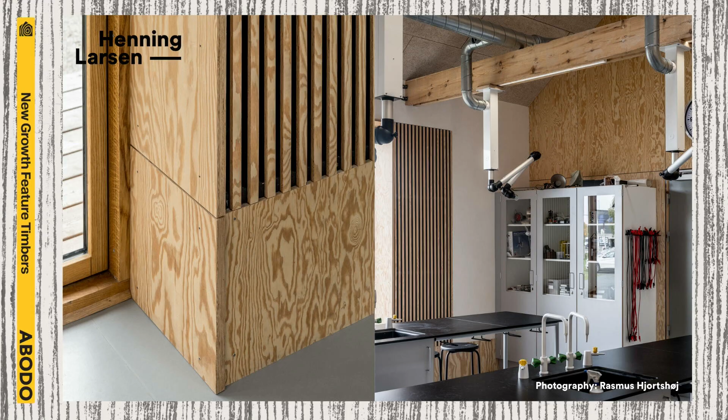Jakob manages the unique industrial PhD program at Henning Larsen, which co-hosts PhD candidates from co-sponsoring institutions in various R&D projects based on different Henning Larsen case studies. Topics include integrated acoustic simulations, lighting design and learning environments, design for disassembly of facades, and anthropological studies following on knowledge dissemination in shared spaces.

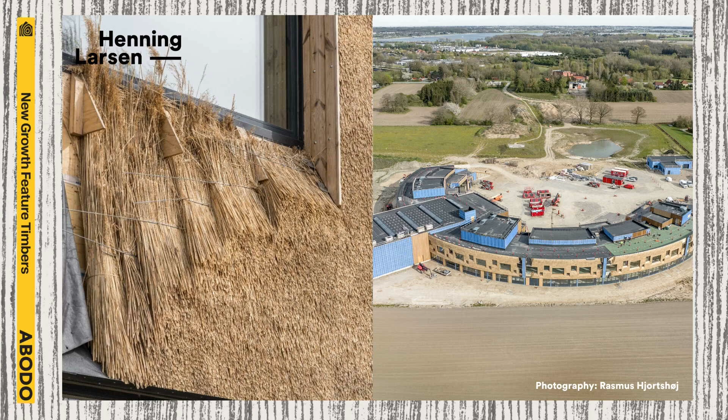And you really see this come to life in the work, from Fælledby in Copenhagen, set to be the city's first all-timber neighbourhood, to the Bestseller logistics hub in the Netherlands, which will be Europe's largest timber logistics centre, as well as projects like Feldballe School and the World of Volvo in Sweden, where materials like straw, seagrass and timber are reimagined in a really contemporary way. It's no surprise Henning Larsen has been recognised by Fast Company as one of the most innovative companies in the world. And aren't we lucky to be able to dive into all of that today?

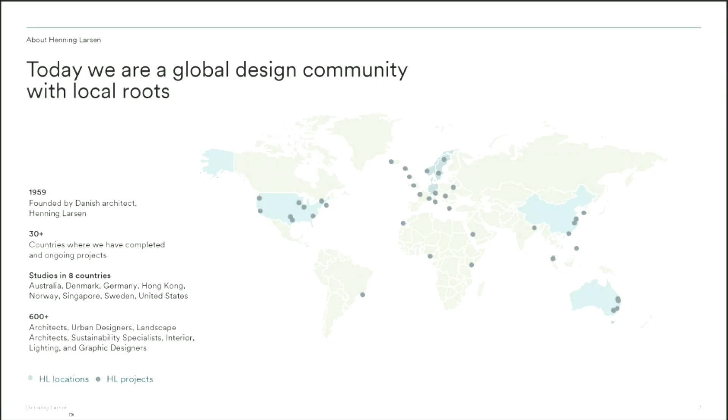This is Henning Larsen. We are born out of Denmark, Copenhagen, a Scandinavian and Nordic company, but we have studios across the globe—just established last year in Sydney, Australia, but also present in the US, Germany, and Singapore. We have a strong landscape team in Singapore.

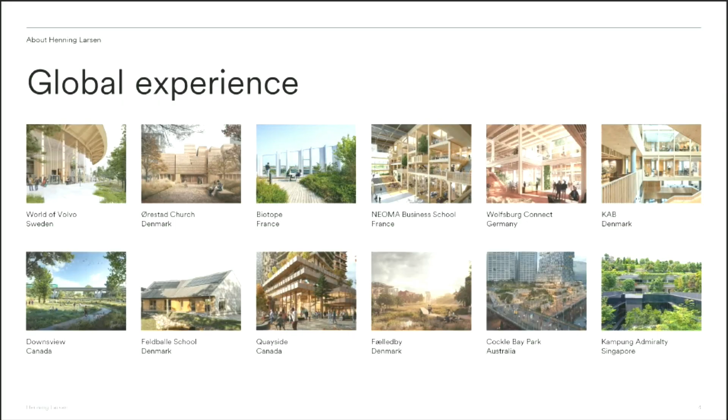This is what we do. You can see there's a lot of green and brown colors here. It's because most of what we do is connected with landscape. We don't see our buildings as monoliths or standalone in the cities—we are very much connecting with the surroundings and the nature around. The brown color indicates there's a lot of biogenic timber in our construction.

Henning Larsen heads architect, landscape and urbanism, and we don't see it as three different disciplines. When we design, we have competences on landscape, architecture, and urbanism all together. So when you talk about a Henning Larsen project, it's not just about the design or the form—of course it's about creating design excellence, but it's much more about understanding the context and the culture, and where we design and who we design for.

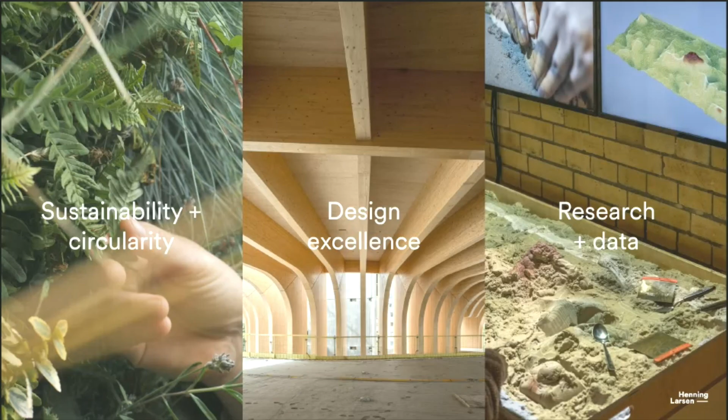We have three design drivers. The center one is about design excellence—long-lasting design, something we can be proud of not only today but also tomorrow. Then we are driven by sustainability and circularity. And then on the right side, Jay mentioned data—that is the right side of my mind, the data and the nerdy part.

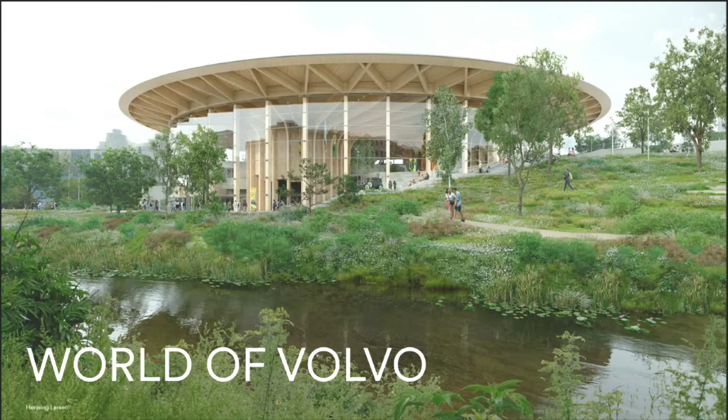In Sweden, they have what they call allemansrätten, the right to nature—no one can own nature. So when you build on a building site, everyone is allowed to go there. It's the same with Volvo here: you can walk around, you can go up to the roof, but if you need to go inside, you have to buy a ticket.

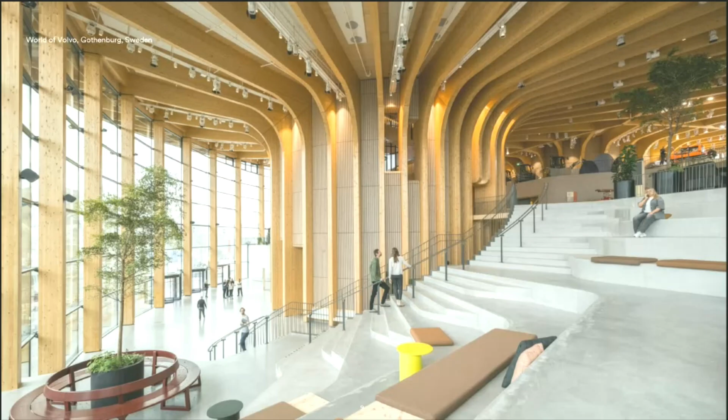This is the highway connecting Oslo and Copenhagen, where you drive through and see the lighting colors of the World of Volvo. It's designed as three big mushroom columns with a three-dimensional glulam structure. The scale of it is quite crazy. This is during the construction process—it opened last autumn, so it's quite new. It was really fascinating to see how this structure came together as part of the design.

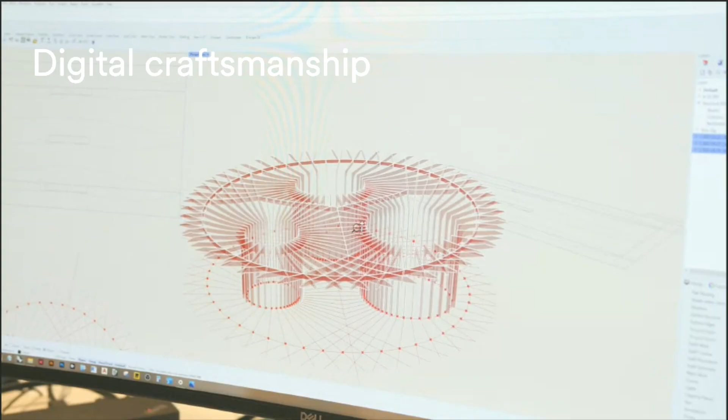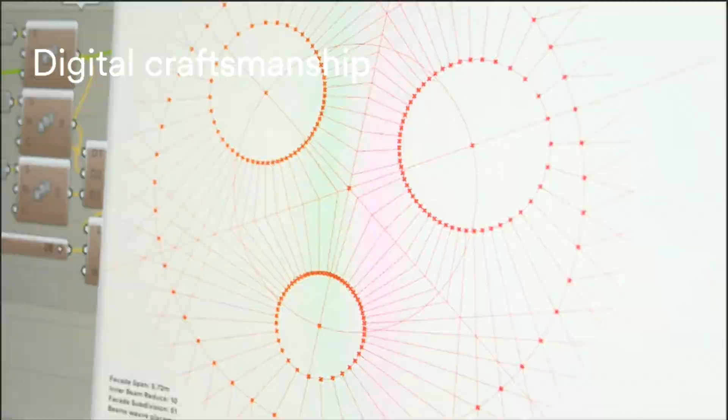What we also did, especially for my team, was work on a computational design workflow. This meant we were very much in dialogue with the suppliers and manufacturers up front—we didn't just design something and ask the engineers or manufacturer to construct it. We worked with the Austrian company to understand the dimensions and how to manufacture the glulam beams, then brought that into the design and built a parametric model around it. So our design drawing was also the manufacturing drawing in the end. And again, why timber?

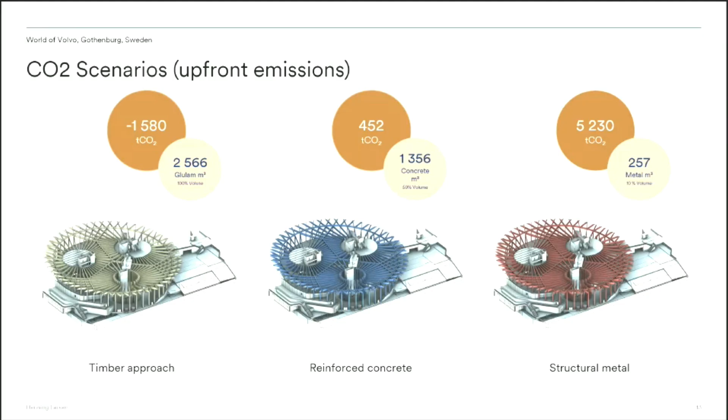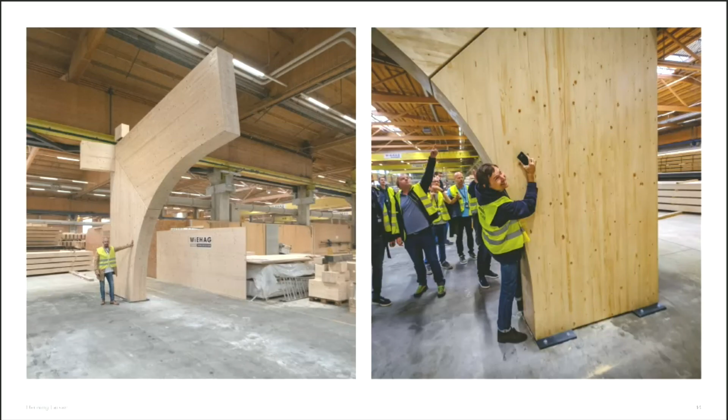I will come back to what is upfront and what is embodied carbon, and the whole life scenarios later on. One of the beautiful things about wood and timber is that it's not only about the numbers, the CO2, it's also about the feelings and the atmosphere. This is Philip, our design director, and he went down to Austria, and I have never seen a design director hugging a concrete or steel beam, but you can see on his face he was just so happy to see that beam coming up, that was the mock-up, that he was hugging it.

As mentioned in the introduction, there's also Fælledby. Fælledby is a new city, a small city developed next to Copenhagen. We have been the master plan designer of the city. This is the first full timber development coming up in Denmark. It's designed as a village, not as a downtown global neighborhood. It's very much on a human scale.

Maybe some of you can recognize this image, or see the reference for it. Maybe some of you have been to Copenhagen, to Christiania, the free city in Denmark. It's the same kind of atmosphere we want to design here - something that is self-grown, something that is at eye level, something where people meet people.

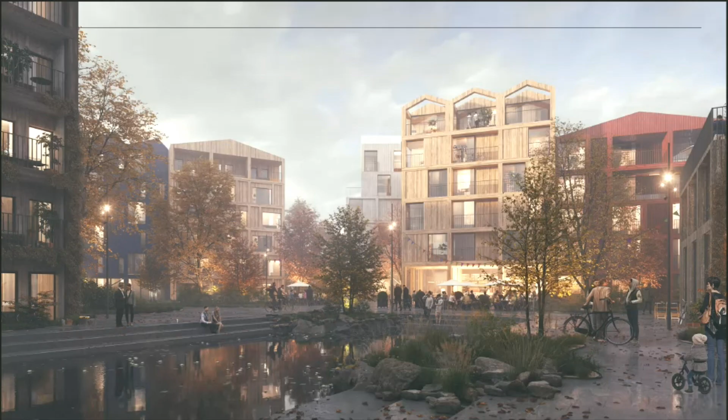We have different architects working with different structures, different designs within the master plan, but it's all within the framework of the master plan and the dogma of designing with full timber structures.

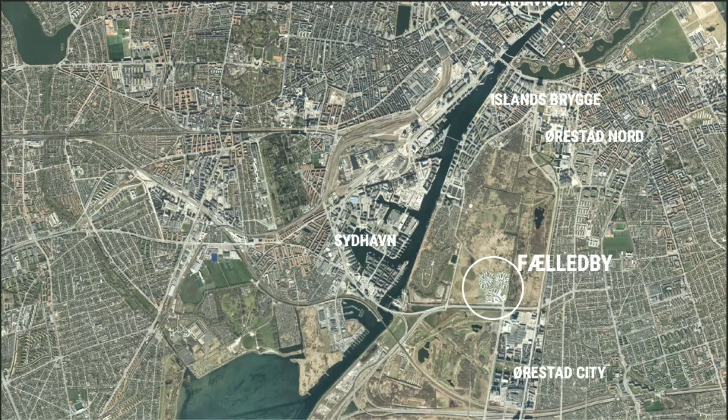Here you can see Fælledby in the center with the ring around it, and it's very much connected to downtown Copenhagen up north. So it's one of the last green areas right next to the metro and the infrastructure. But if I zoom in, it's about connecting green and urban.

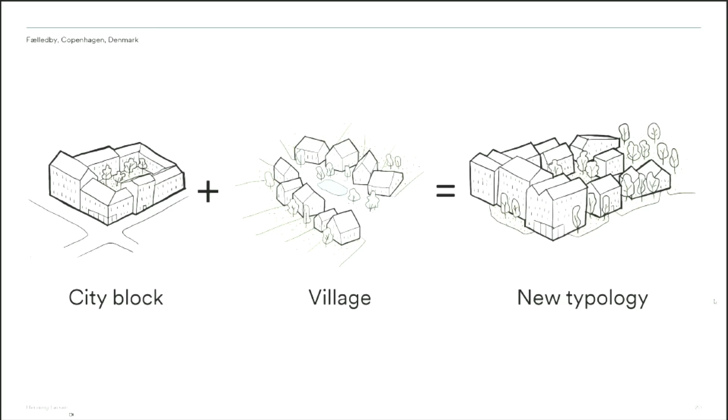We had the idea of taking a traditional city block - Copenhagen is built around the city block, where you have the private in the courtyard and the public on the perimeter. But here we want to combine that with a village structure where you have the central plaza, the pond, and make a new typology that opens up to nature, but has an edge to the quarter or the plaza and center.

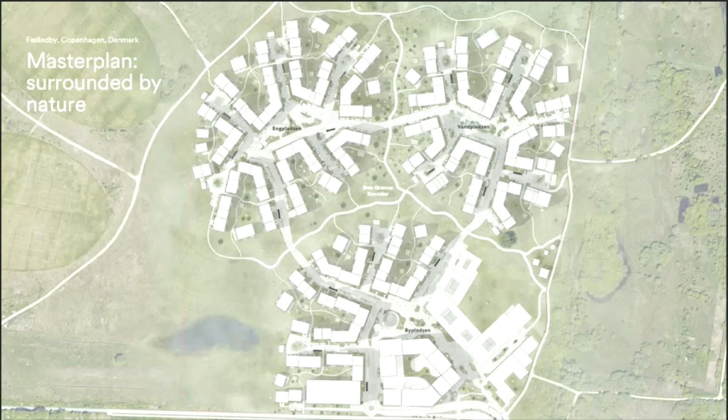Instead of designing a full master plan that was just uniform, we designed three kinds of small villages with one plaza in the center, and then it opened up. That's also how we structured construction - at the moment we are building the one in the top right-hand corner, and then we go to the next one, and then to the left one.

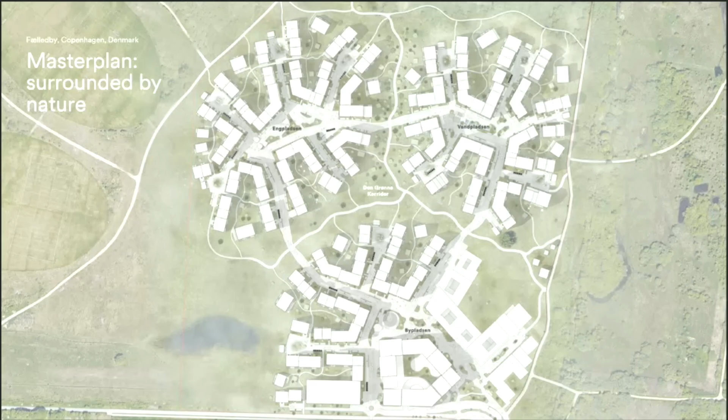There's parking around when you come in, but you have to take your bike or walk to your apartment. Of course you can come around as a fire entrance, and you can have drop off, but not every apartment has a dedicated parking place. It's very much connected to a bike cycle network and the metro line.

We have promised to deliver 10% higher biodiversity net gain. That means we take out some green area, but we provide green area with higher biodiversity, a higher habitat quality. It's also such that if you buy or rent an apartment here, you are not allowed to bring your house cat - no cats are allowed because they chase the small birds and the mice. So it's not only something we design for, it's also the premise of nature when you move in here. You can see all the roads and pathways are lifted.

It's also to be resilient, so when we have heavy rainfall it can be absorbed by the landscape - it's not like another drainage system or pipe, it's open water resilient management. Here you can see this is from last week where the structure is coming up. The first residents will move in this summer.

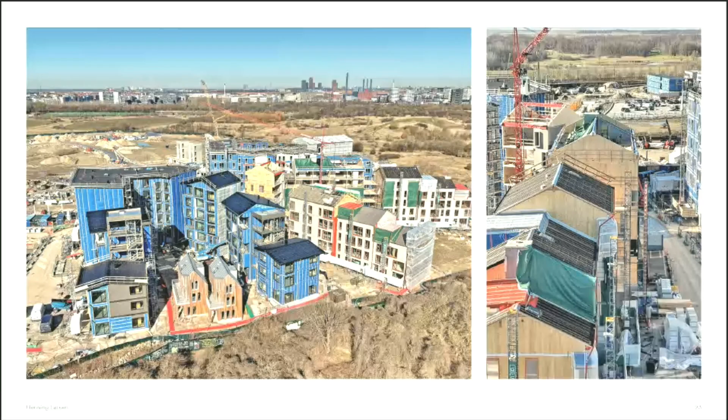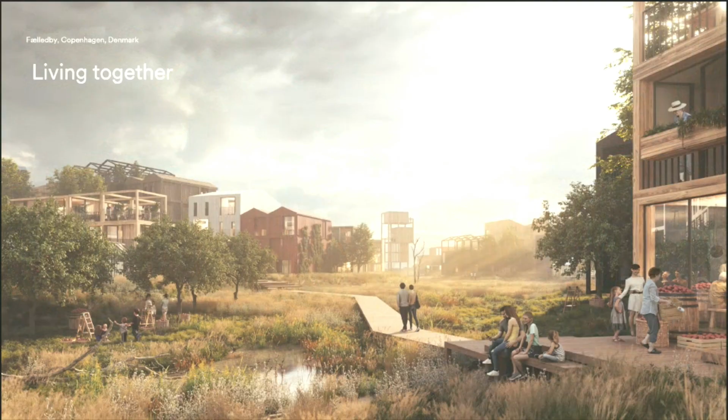It's all built in timber, and most of it is with prefab. We do prefab elements like these container blocks, and we ship them and put them together like Lego blocks, building around that. There's really much diversity in it, so it seems very random, but it's actually broken down to Lego blocks that you can build offsite and transport. We also have low-income family homes here, so it's about keeping prices down and buildability up. The image we imagine in the end is that you'll be connected with nature, living close to nature, but also in a new community next to Copenhagen.

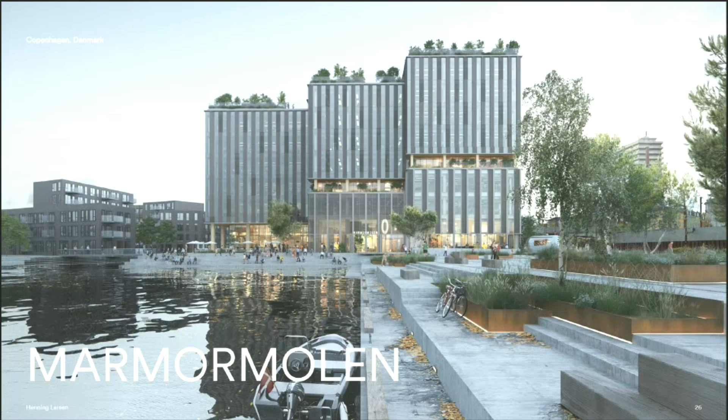This building is also ongoing. This is the largest timber building coming up in Denmark at the moment. It's called the Marble Pier, located on the harbor front of Copenhagen.

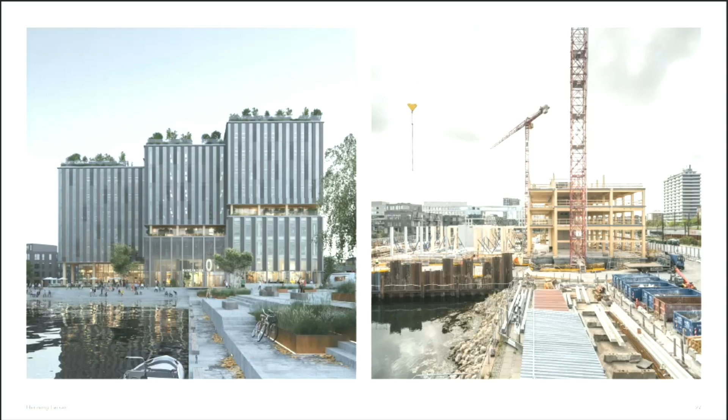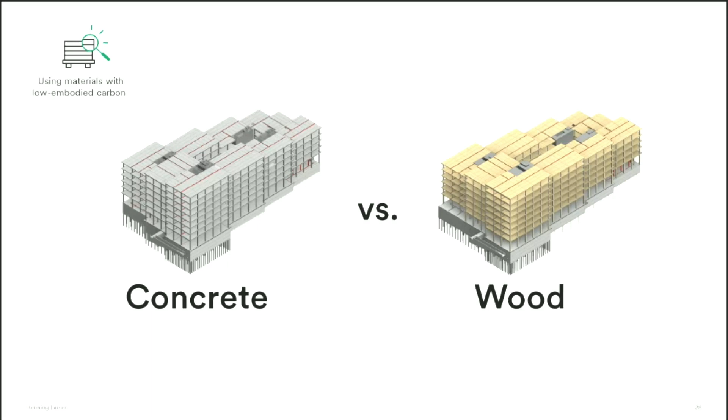It's a hybrid structure. We have concrete cores, and slabs, beams, and columns with glulam structure. The good thing about this, coming back to data, is that this building was designed as a concrete building. We won this competition about 5 or 6 years ago, and at that time we designed it in concrete because that was the industry standard. But the client came back and said they had difficulty finding an anchor tenant, because the anchor tenant wanted a more sustainable profile. So together with the client, we decided to redesign the structure from full concrete to a hybrid, predominantly timber building.

So we have data, a full Revit model of both versions, so we can compare apples to apples. If you look at the upfront embodied carbon for just the superstructure above ground, we have a reduction from concrete to timber of around 8,000 tons of CO2. That means we have a minus on the timber side, because the carbon sequestration in the biogenic materials outweighs the concrete cores and the supporting steel structure. The red lines are the steel structures that are supporting. If you look at the whole embodied carbon for the entire structure, including basement and envelope, it's not negative, but we still have the reduction of 8,000 tons of CO2, around 3.7 kilograms of CO2 per square meter per year.

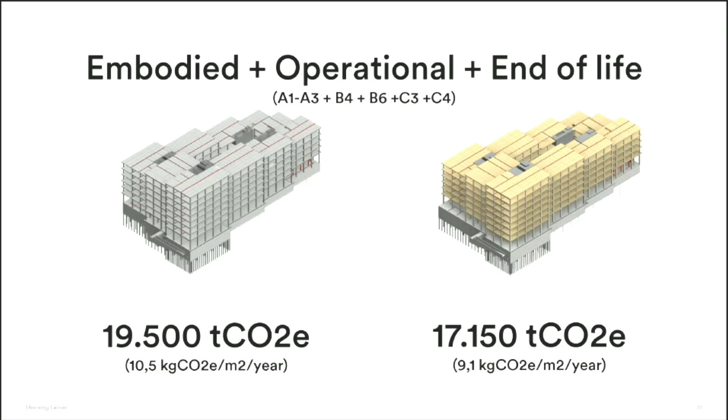This is a number I'll come back to later, but it's what defines how you get a building permit at the moment in Denmark under the new regulation. If you look at the end-of-life scenario, it balances out. That's how we calculate the life cycle of the building, the carbon life cycle. There's an end-of-life scenario where the biogenic materials release CO2 in the C3 and C4 phases, so that balances up. That's why we look very closely at the embodied, upfront emissions, the whole end-of-life scenario, and of course the operational emissions.

I said in the introduction that this is not only timber and wood - it's a hybrid structure. We have the base and foundation in concrete, and the cores are also very much about stability in the building, but also fire regulation and fire safety with the concrete cores. It can also be done differently - we're doing a residential building just next door now where we use CLT cores.

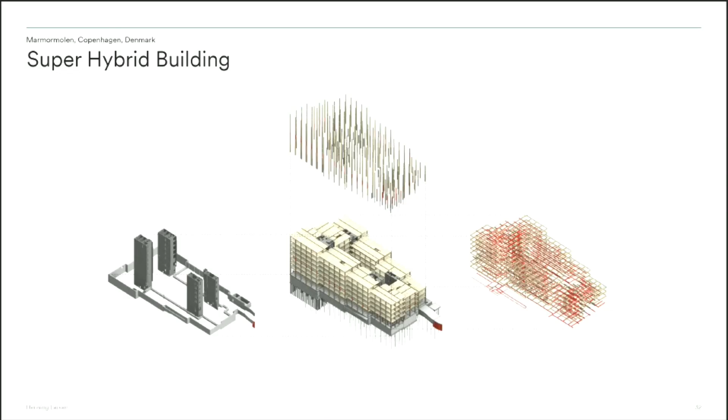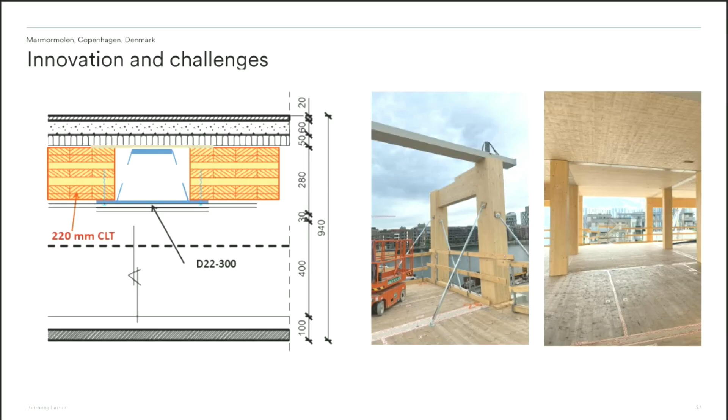Then we have substructures in steel, and that's also because this design was originally designed as a concrete building when we transformed it into a timber building. Of course, timber, as you saw with the Volvo case, takes up more mass - the beams and columns are bigger. So we have this hat profile, hiding the beams so we can run the HVAC ductwork through without compromising floor-to-ceiling height. But these are quite substantial, like fridges coming down - 60 by 60, those beams coming down. So again, when we work with these kinds of structures, it's very much about space planning and space layout.

That is the first thing we look at, how to spatially layout these open floor spaces, because the columns take up more space than they do with a steel or concrete building.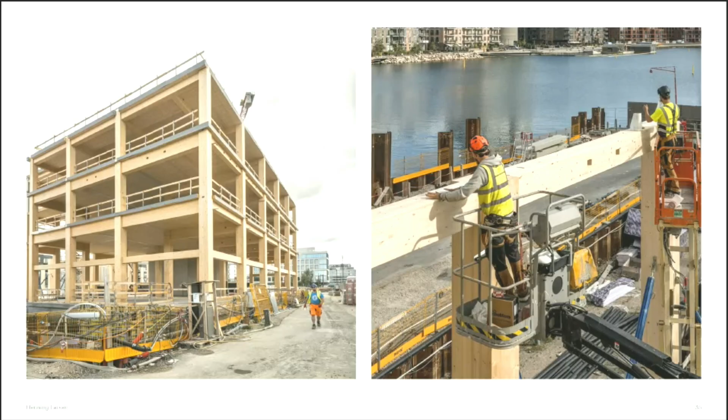One of the good things is that the building site was more quiet when they came above ground. That meant they could actually work on the weekend. Normally every building site in Denmark is closed on weekends because of noise pollution for the neighbors living next to the site. But because this site doesn't have steel welding or concrete piling, they could work on the weekend too, putting together the timber structure.

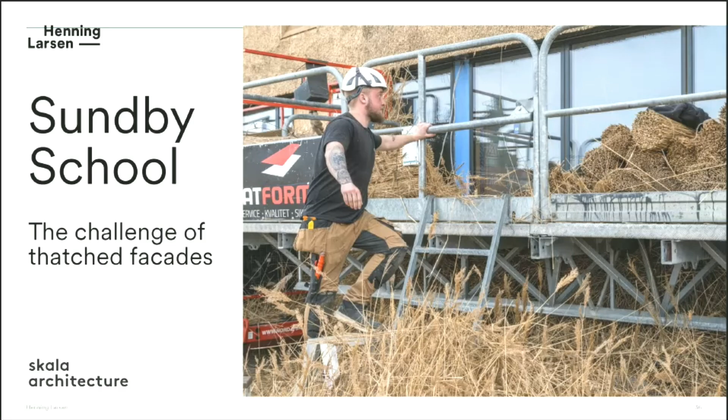The next project I want to show is more about the use of biogenic materials in an alternative way. This is the Sundby School, a primary school in Denmark, and it's the first school where we have a thatched reed facade. The inspiration comes from the local community.

The traditional historical buildings have a thatched facade, not only roof. Maybe some of you have seen roof structures like this in the north part of Germany, but it's also very traditional in Denmark. In this region they also have the facade, so we thought maybe we could be inspired by that and use the technology and craftsmanship that was also present in the local community.

Here you can see the craftsmen attaching the facade. We have a facade with a wind barrier on the inside, and the thatched reed is exterior cladding. It has a lifespan of around 20 to 30 years - we are expecting 25 years before it needs to be retouched or recladded.

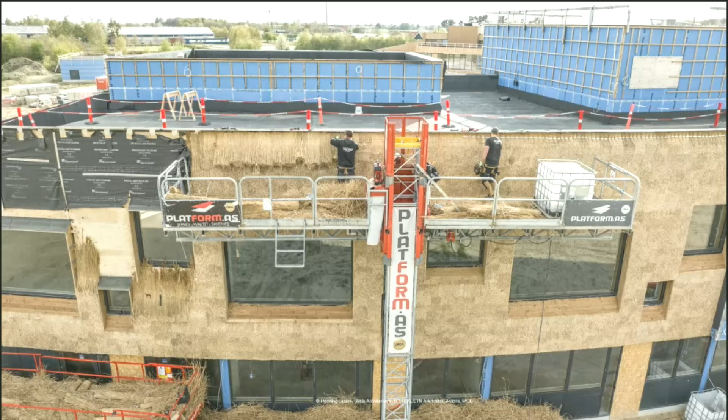You see how they're working, and there's a lot of leftover waste product. But again, it doesn't have any impregnation, it's not chemically treated, it's purely natural. They are water resilient. So all the leftover product we just put in a container and then put it out in the field as fertilizer or for soil. The leftover product just goes into a circular system with nature.

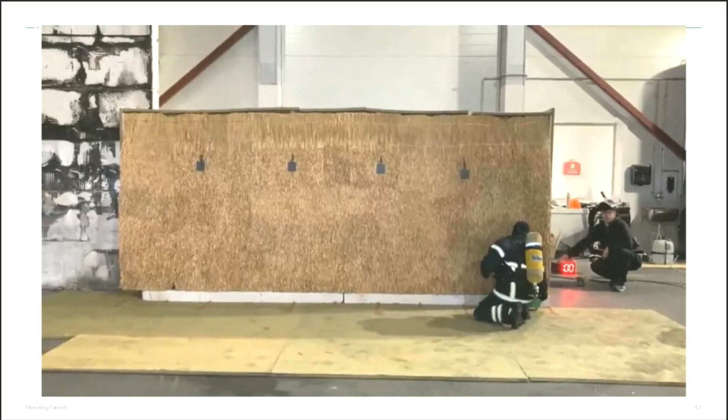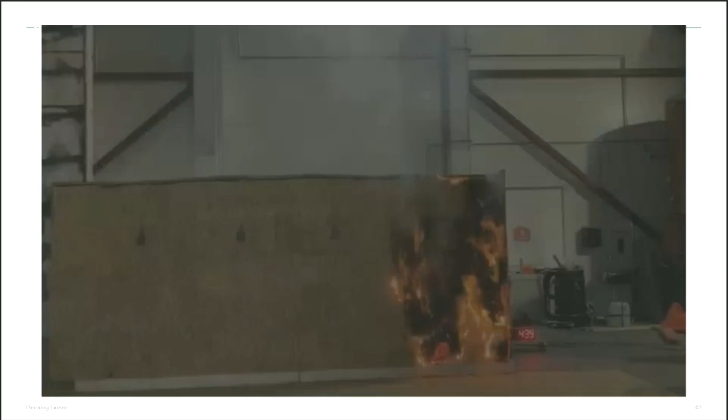Again, a lot of people ask about fire. Yes, reed straw can burn, but it's actually not that flammable. This is the fire test we did with the Danish Fire Institute. Here there's a wind cannon on the right-hand side, blowing wind across the facade horizontally, and we observe the spreading of the fire. You can see the clock - now almost 6 minutes, and it hasn't really spread. It's not like paper firing up, it goes quite slowly.

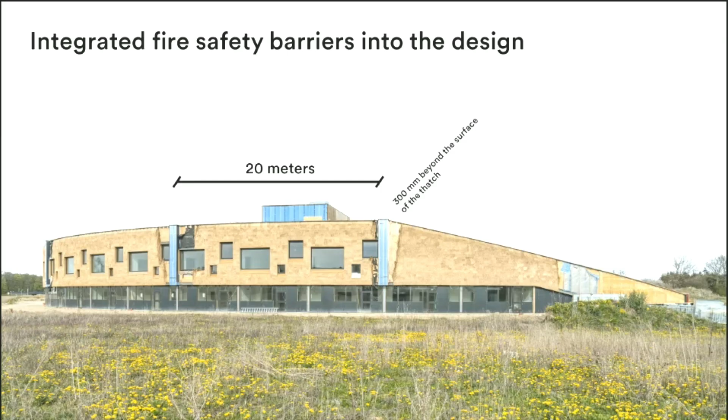But it's also a risk, something we had a very serious dialogue with the client about. We did those mock-ups, invested in it, and did a lot of theoretical exercises, but we had difficulty understanding what the fire strategy should be. It ended up that we went and talked with the local fire brigade, and they told us their fire trucks could spread water 10 meters to the other side. So we decided to put in vertical fire barriers every 20 meters along the facade, so the fire brigade could manage the fire within that 20 meters. That was part of the fire strategy - sometimes you need a lot of technical analysis, but sometimes you just ask the fire brigade how big their truck is, and you find a solution.

This is the courtyard in the center where it steps down, and you have the thatched facade towards the fields, the connection to the surrounding nature.

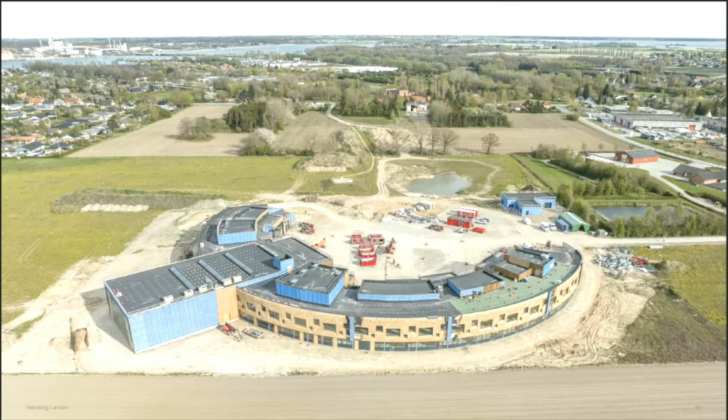So why so much talk about wood, straw and biogenic materials? In Denmark we had an organization called Reduction Roadmap, and it was not a political organization - it was driven by the industry. It was industry partners, a small group that became a bigger group, across manufacturers, architects, designers, and engineers. We all said that we can do better, and we will need to do better.

So there was political pressure from the industry to put up carbon targets on new builds, and create a roadmap for it. It all started because we want to be within the safe operating space, within the planetary boundary. We need to reduce our carbon emissions, especially on new builds. So a lot of analysis was done on what we do today with our housing and what we need to do in the future.

Where do we need to go? Today we spend around 480 kilograms of CO2 per square meter on new builds in upfront carbon, and we need to go down. It's a huge reduction if we want to be within the planetary boundaries, down to around 20.

If you look at kilograms per square meter over a year, in Denmark we calculate over a 50-year lifespan of the building. Buildings constructed before were around 10 kilograms of CO2, and we need to go below 0.5, 0.4.

So we have a big challenge in front of us. But this actually was a push for political action. Last year new requirements came out for CO2 calculation for all new builds. There's a limit - you cannot get a building permit if you don't document the total life cycle carbon of your building.

It's divided into typologies - small buildings, vacation homes, residential and office buildings, which are the majority, around 7.5 kilograms of CO2. Then there's a limit on the construction side, shown with the dotted line at the bottom. The 7.5 is what we do on the building - the operation, the energy, the concrete, steel and timber that go into it. The bottom figure, 4 and 5, is for construction - the carbon it takes to transport material from the manufacturer to the building site and the machinery on site.

So what we see today is a lot of electrification on the building site, which also benefits lightweight structures like timber - not so much diesel engines. Everyone needs to calculate the amount of diesel and electricity they use on building sites. That's mandatory now. So this is the standard today, and next year there will be an even more ambitious standard.

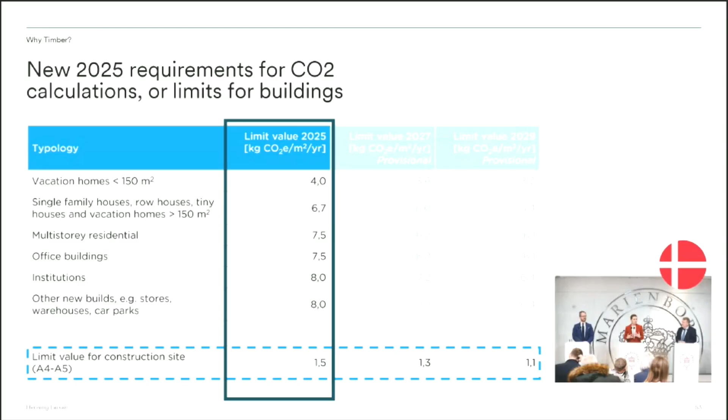In 2029 it will be even more ambitious, and hopefully there will be a standard coming after that, and hopefully we can go further than that. But is that ambitious enough?

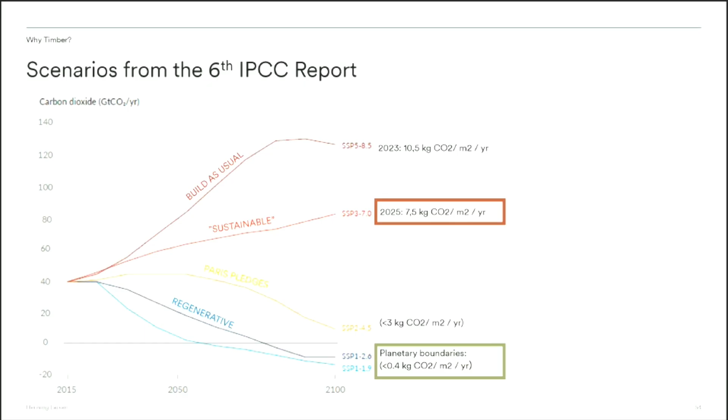With regard to the IPCC report, this 7.5 figure, we can barely call it sustainable - we will still emit carbon. We need to stay within the planetary boundary as listed before. We need to go low, below 0.4 kilograms of CO2 per year. So it's a long way there, and we need to act quite fast.

How do we do it in Denmark? This is the LCA, the life cycle assessment of a building. In Denmark you need to take into account the product phase and the construction phase - that's what I described before. You need to document those two.

Then in the in-use phase, you need to take into account replacement. So if you have windows with a lifespan of 25 years, you need to calculate them twice in the CO2 calculation. Then you have the end-of-life scenario, the waste processing and waste disposal.

As I said before, that's where the carbon is released again from the biogenic materials. Then you have the operational energy - the energy consumption, electricity, and district heating that goes into the building. And then you have the opportunity for beyond the building life cycle.

If you use reused elements, or recover materials, it counts as zero in your calculation. So if you have a reused concrete slab that already emitted its carbon and you reuse it in the building, you don't need to calculate it twice - it counts as zero emissions. So that also pushes the industry very much toward circularity.

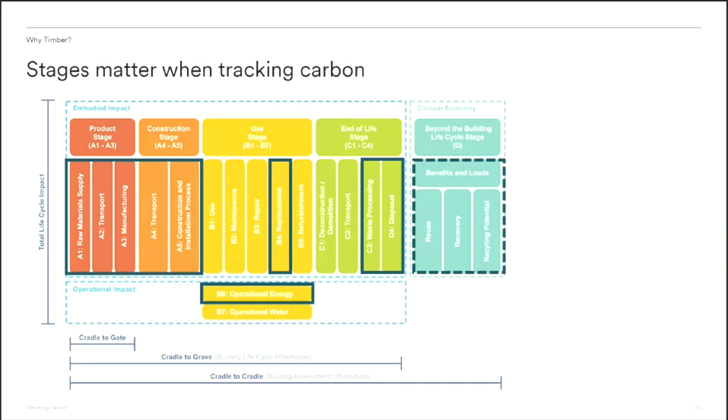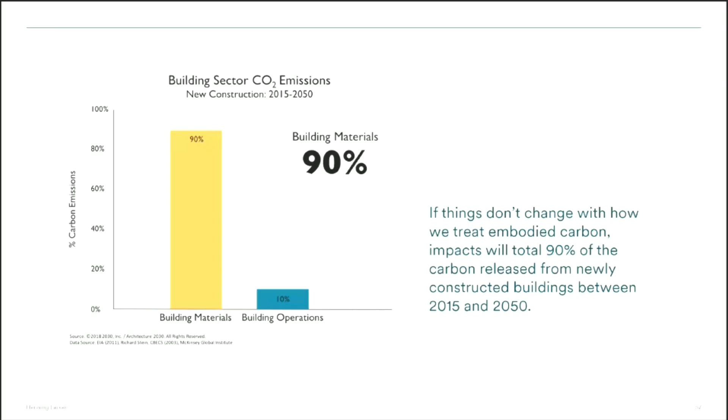Why so much focus on embodied carbon? It's because in Denmark the grid is green - we've seen a lot of offshore wind farms coming up. That means the emission factor in the grid is low, almost zero. So when we do a carbon calculation, it's almost like 90% is in the building materials and 10% is operation. It's very different when we go to the UK, Germany, or other countries - it's very much about how the grid is put together.

So there's a lot of focus on operational carbon, reducing energy in Australia, because there's a lot of coal in the grid there. So when we look at design strategy, this is something we look at first: what is the grid, what is the infrastructure, what is the approach here. It makes much more sense in Australia to look at reducing energy consumption and integrating renewables than it does in Denmark and New Zealand. But what is carbon?

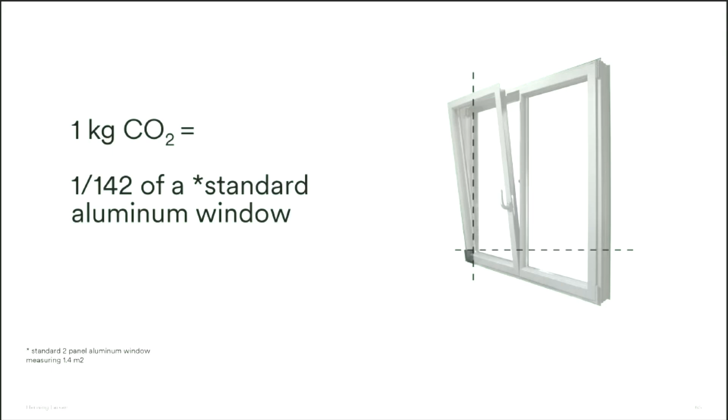1 kilogram of CO2 is equal to producing 3 cucumbers in a greenhouse in Denmark, and it's also equal to a quarter of a grilled chicken. It can be related to windows too. Imagine how many cucumbers there are in a window like this: two layers of aluminium standard frame window, a steel beam, and a stone wool insulation bed.

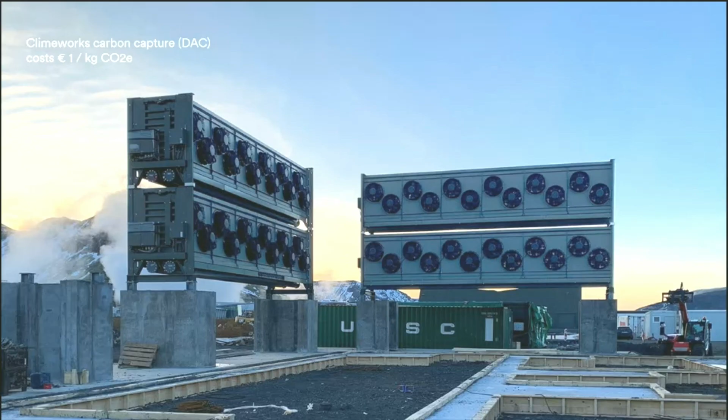There's also a dialogue about capturing carbon, but it's quite expensive. If you need to capture carbon using the carbon capture plant in Reykjavik, Iceland, you'd need to pay around 400 euros to capture a window like this. So the investment should definitely be in reducing, not capturing.

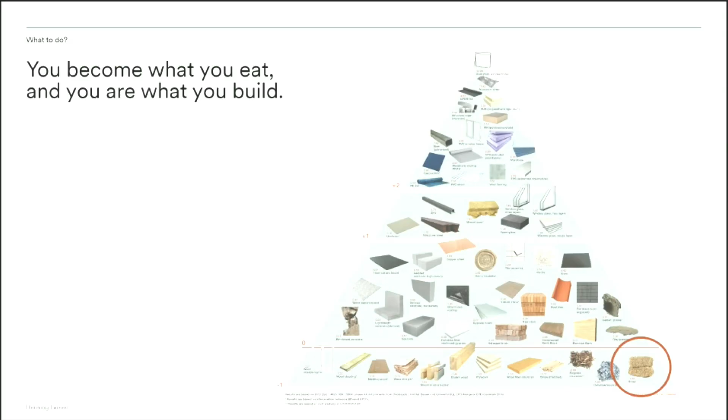Inspired by the material pyramid, we looked at what we could do, and what we could do best. We looked at the right-hand corner and saw straw. Could we build something out of straw? That inspired us to go into a research project with a small school, an extension of a free school in Jutland called the Feldballe School.

The idea was, instead of fulfilling any building regulation, we had a client who said, I don't want to look at building regulations, I want to look at what makes sense for nature and for people. So we decided to build a building without any mechanical ventilation systems and with full biogenic construction above ground.

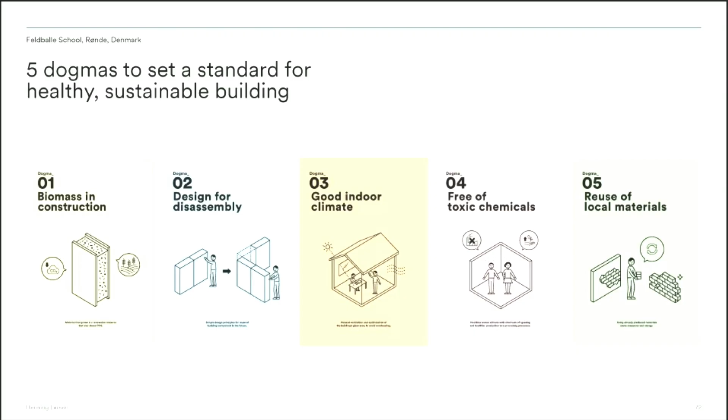We set up some dogmas, maybe like Lars von Trier's dogmas from 15, 20 years ago. It was the same here: no building regulation, only dogmas. Use of bio-based materials, designed for disassembly, good passive indoor climate, free of toxic chemicals, as much local reuse as possible. That was the dogma we set up, and that was our design driver.

We teamed up with a company called EcoCocon that mass manufactures straw components, like Lego blocks. They are prefab elements that are screwed together on the building site. This is Magnus and Peter, the two design architects working on the project. They worked with the constructors on the building site, sleeping in a shelter with them, really trying to understand how to put a house together built out of straw.

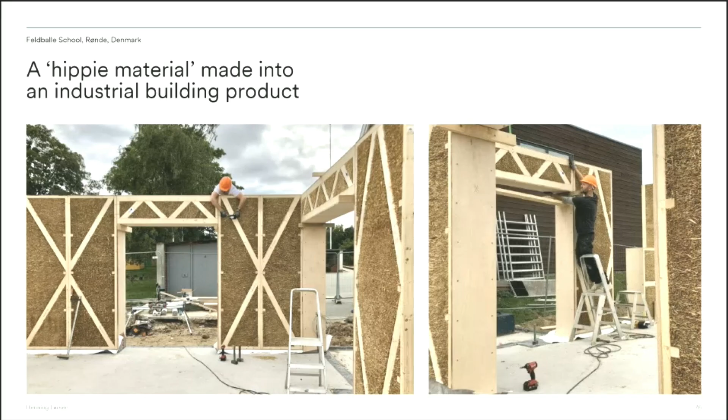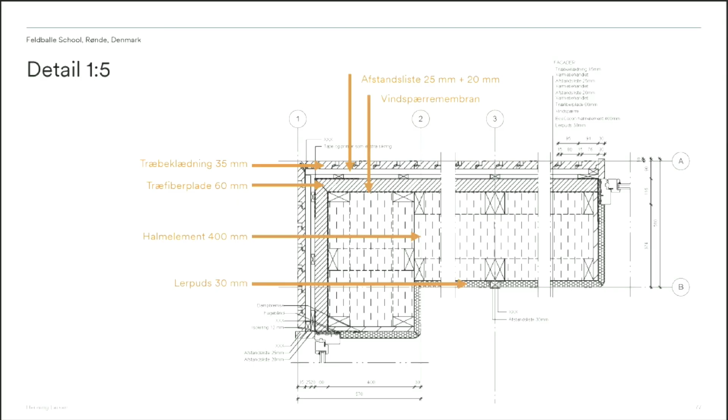This is the section, unfortunately it's in Danish, but going from outside in: we have wooden cladding, then a ventilated cavity, then wood fiber board insulation, then a wind barrier, then 400 millimeters of straw element, and then clay cladding, not gypsum, on the inside.

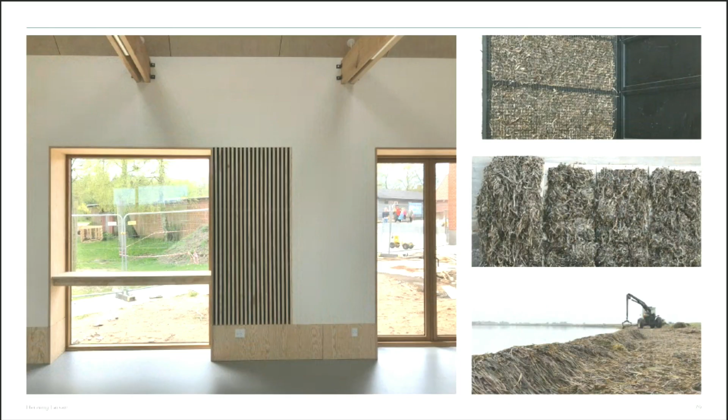Very basic - here you can see the outside, and here the inside. We have an upstand where we have all wiring and electricity going, also to protect the clay cladding. Clay is a bit more vulnerable than gypsum, so you need to rethink that into the design.

This is about seagrass - no mechanical ventilation, purely natural ventilation coming through the facade and going through opening windows in the top. It's a smart system, so we have CO2 sensors that open and close the window. Through those lamellas you can see in the pictures, there's a window.

There's a small opening behind that is mechanically controlled. The mock-up is in the right-hand corner, and we have an eelgrass filter in it, so it filters the air coming from the outside, mostly for noise and for heavy particles. If you want to change the filter, you just open the lamellas and take out the filter.

Then you go to the shore, collect some eelgrass, dry it up and put it in again. It's not treated at all - it has a very salty content, so there's no insect living in it. Quite basic, but again, no chemicals. Next to it there's a chemical class with ventilation, and we tried to measure the chemical content, but the kids moved in before we could actually measure it. That was a bit of fun.

But again, scaling - this was only a 250 meter small school. The next building we built in straw is 155,000 square meters, a school. The logistics center in Lelystad in Holland is for the Bestseller client. It's a logistics center that has both high bay for storage and distribution.

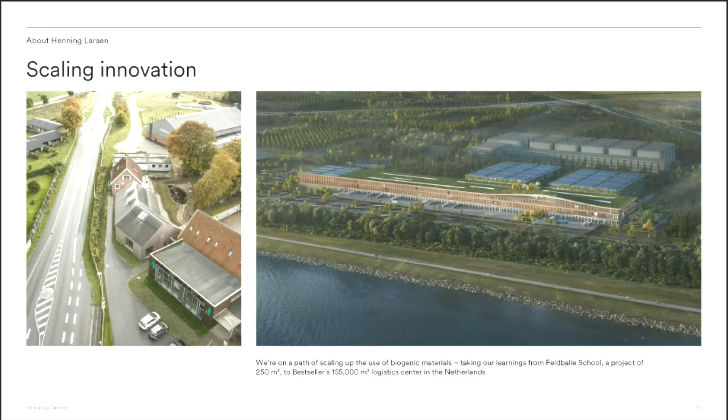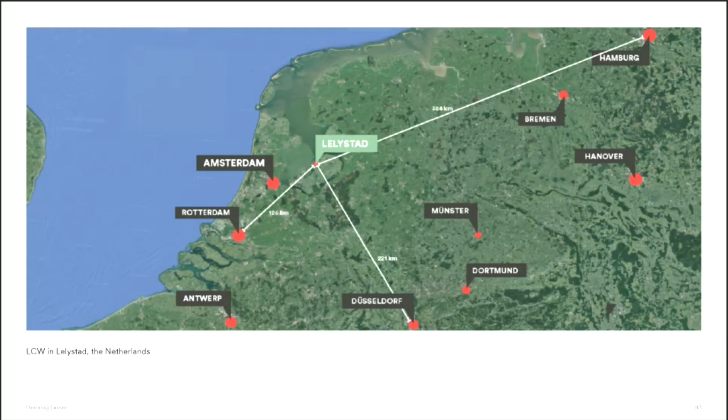It's coming up now, started design two years ago, together with our partners from Ramboll and a Dutch main contractor. It's based between Rotterdam and Amsterdam in Lelystad, very much next to the shore. It's a lowland area, so again a big focus on biodiversity.

Here you can see the main entrance - this is the right hand side where people come in from one side through nature, through the forest, and then the infrastructure comes in from the back side. Then we have the terminal building that is 500 meters long, with a lot of mechanical distribution, and the high bay storage area on the back side.

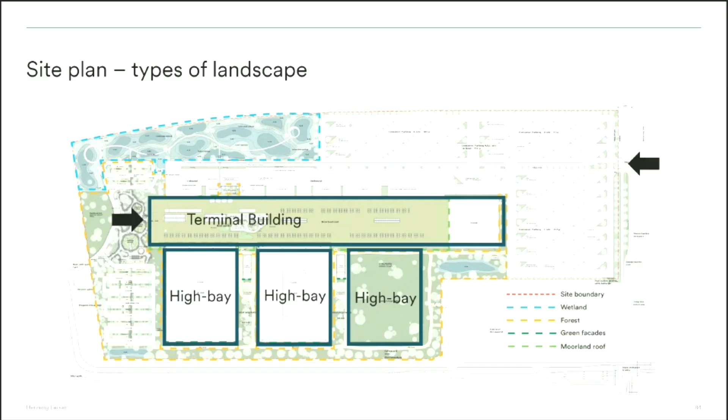It's fully roofed with green facade and PVs on the roof. So this is the rendering of what it will look like - this is the main entrance.

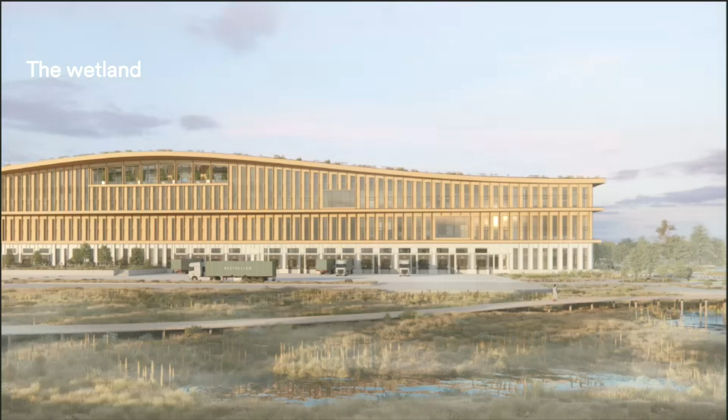Again, we're measuring the biodiversity. We are building on the site, but we are improving the biodiversity by integrating wetland and green roof - you can see the wetland with the boardwalks.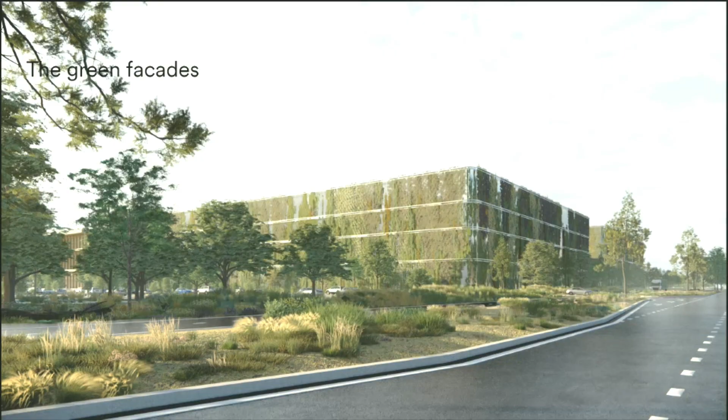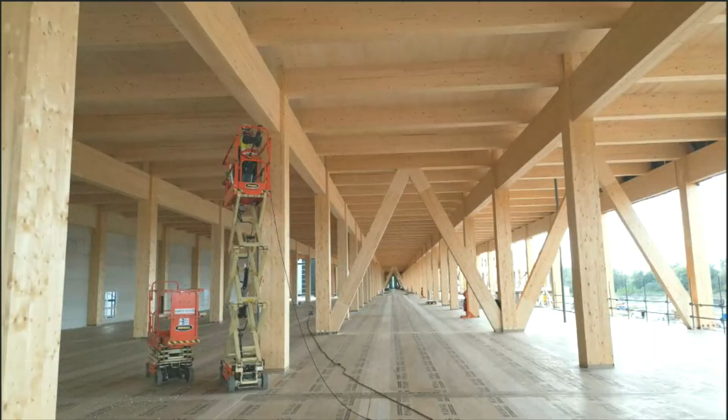This is the back side with the high bay, the green facades. Some of these images seem very beautiful, but it's actually happening now - this is the terminal building, 500 meters long, fully timber glulam structure.

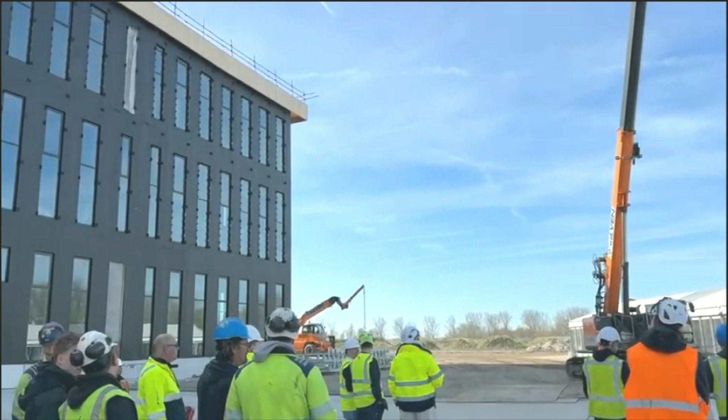And this is from last week - I didn't put the music on, but this is what you call the topping out of the building.

Coming back to the straw, as you saw in the Feldbälle project, the facade insulation was straw paneling, and we do the same here. We have a build-up from the upper floors with wooden cladding, and for the ground floor aluminium cladding, but it's all built around the straw element inside.

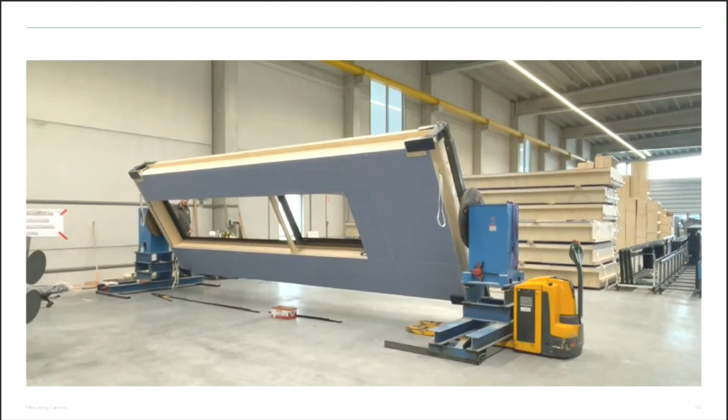It comes as pre-manufactured elements to the building site - they arrive like this in trucks, very flat packed, and then on site they are clad in, brought to the main structure, and mounted on it. So, a very basic system.

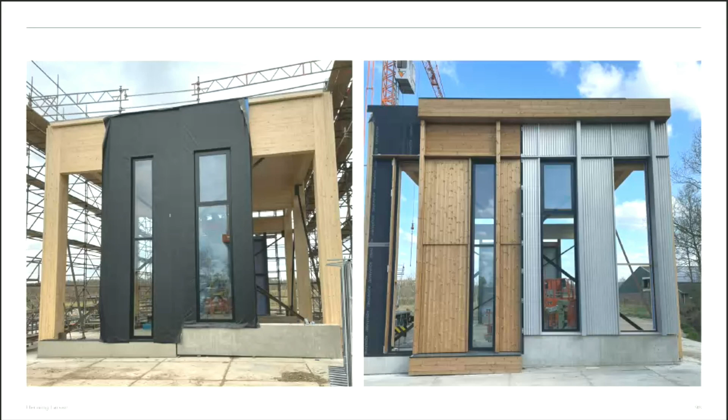And here you can see some of the mock-up from the upper floor where we have the wooden cladding around it. I don't actually know the manufacturer of the wooden cladding - maybe I should have known that, but maybe we can discuss that, Daniel, afterwards. And then some of the detailing of it. Here you can see the scale of it - it's huge when you're down there. 500 meters is long.

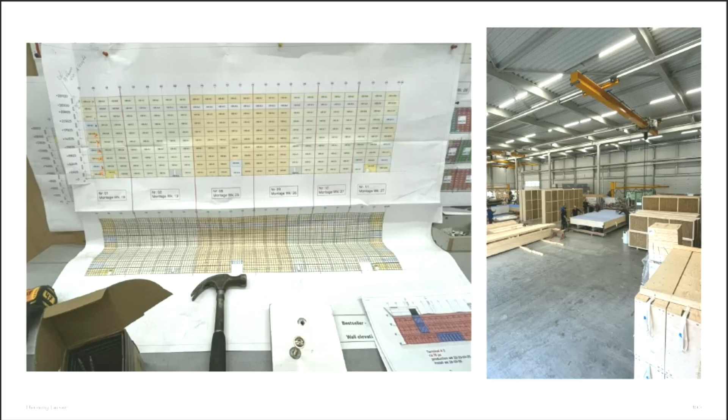And the high bay - this is a working drawing of the high bay, and you can see this is inside. They're enormous. But imagine all this is straw. Cut a small hole in it, and you can see the straw just inside it. It's quite significant, and they're mounting around 200 square meters of straw facade every day, with 3 people, so it's very fast.

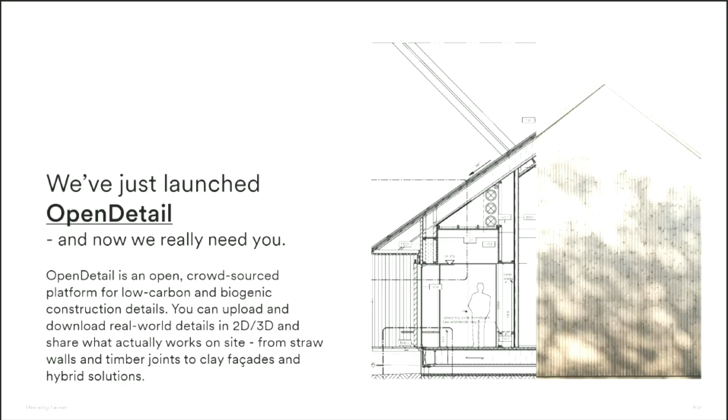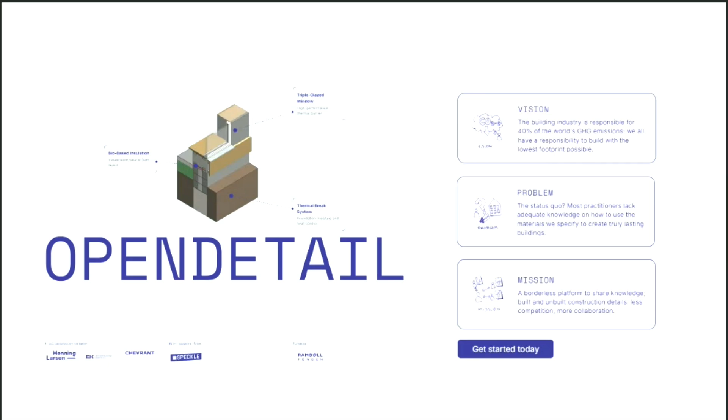Last thing, I want to share something with you where you can get access to all the details I showed today. We just launched what we call OpenDetail. It's a web-based portal where you can get access to 3D and 2D drawings. You can also upload your own drawings, but it's based on biogenic materials, so only biogenic materials are there, and it's free for download. You can look up different projects we've done with some of our partners, and get access to the details 1 to 5, download it as a PDF, and integrate it into your BIM model.

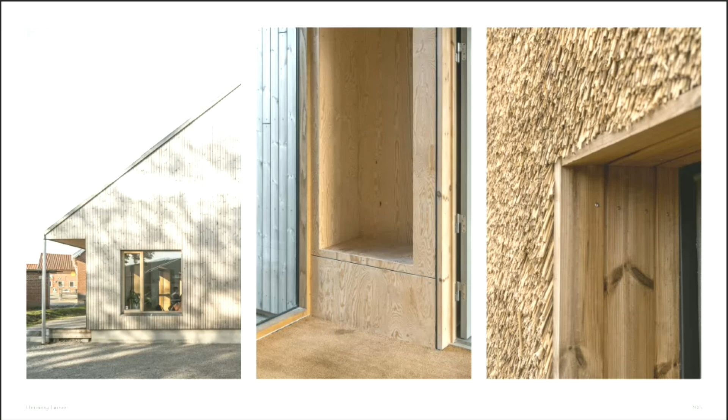We also have CO2 data on it, and we're having EPDs on all the products used in it. We will share this presentation afterwards so you can have the direct link to test it out. But this is just some of the detailing you can find in there to use in the projects you're working on.

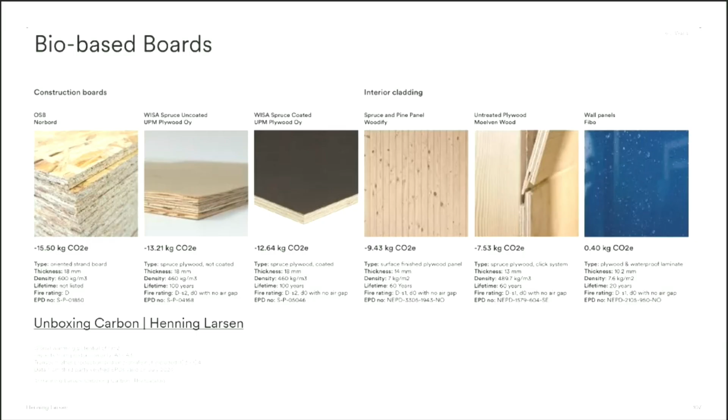Then we also have the carbon catalog, both for interior and exterior cladding, collecting EPD data from the manufacturers, but putting them into a system per square meter so they're comparable across different manufacturers. You can see, looking at bio-based boards here, that they have an upfront negative carbon impact compared with more mineral-based boards. Sometimes it's just a decision choice when you do the spec on your building. But we have this catalog where you can filter through - there are links to the manufacturer, you can see the EPD numbers. We're having manufacturers calling us every day to get their data in, because this is also very much pushing the industry to deliver better on the EPDs.

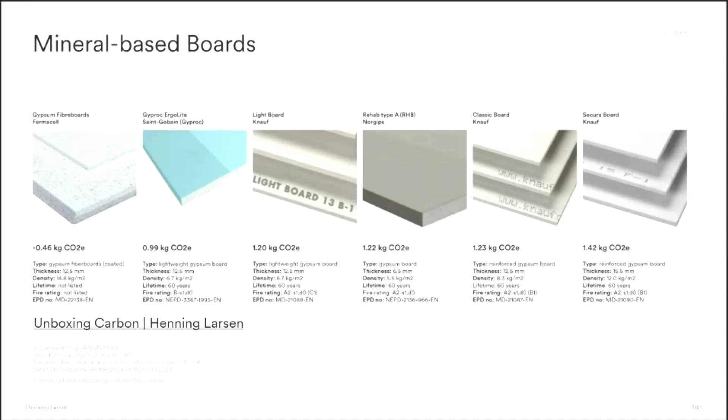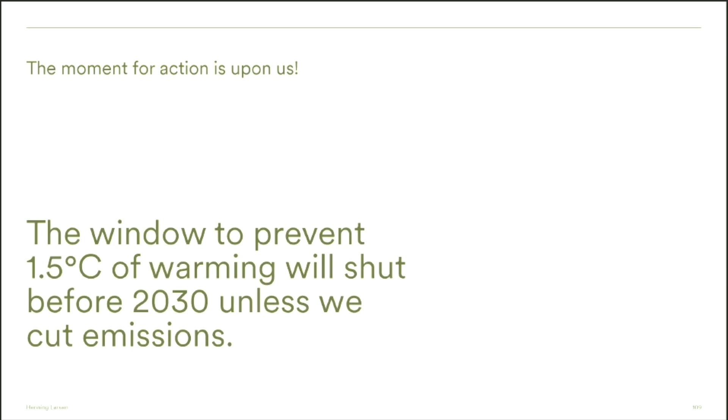Jakob, I've never heard carbon measured in cucumbers before, so thanks for that interesting insight. Yeah, and what should we do in New Zealand? Is that cucumbers are... yeah, maybe I'm going to steal that idea.

That's great. Jakob, there's been quite a few questions come through on the chat, so I'll start with some of those. Ellie Perkins is asking about the use of modular construction that you applied in the Fælledby project, and she wondered if that helped reduce the embodied carbon further compared to building on site.

Yeah, it did. As you see, a lot of the building we do on site involves hybrid structures because the joint between different elements is important, and they are difficult to do in biogenic materials - not impossible, but difficult. So by doing it prefab, we get all the structural elements built into the prefab element, so we can reduce some of the carbon related to the joints and to the build-up. So that supported us, and it also supports what I said about